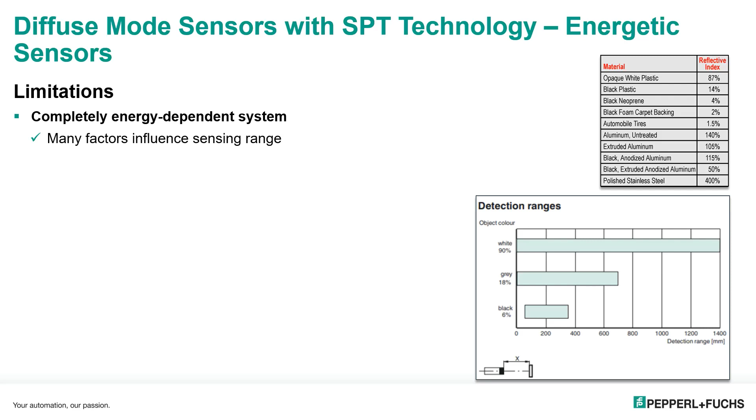If in the background there are more reflective objects than the actual target, then the background objects will be detected, but not the actual target. So this is an energy-dependent system. The amount of light energy coming back from the target depends on the reflective index of the material. Please look at the animation to see how different color of the target influences the amount of light energy coming back. And one more time.

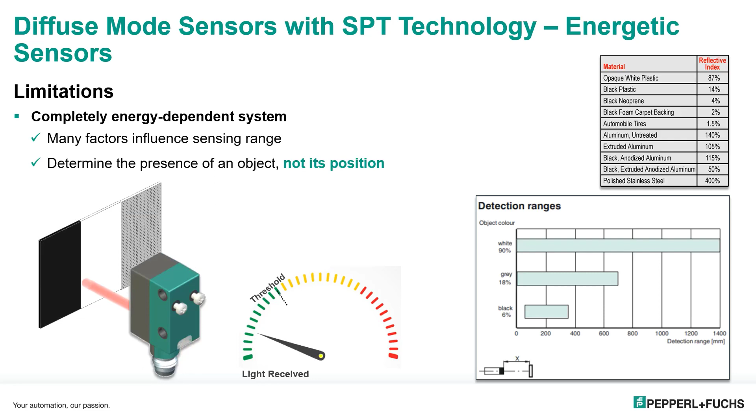Here you could see the most popular energetic diffuse sensors in our portfolio. Those are sensors with SPT single pixel technology: GLV18, RL31, RL61, VT18, ML17, OBT series, GLK18, OBD, and OCT300.

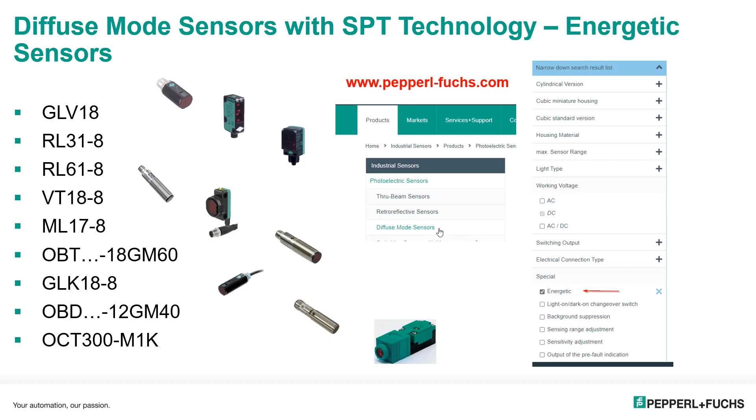Based on the triangulation principle, the sensors of Pepperl+Fuchs are all either background suppression or background evaluation or analysis. Today, we will be looking particularly at the background suppression sensors. They detect objects up to a defined distance but not beyond. The light from the sensor's emitter is reflected by an object to the sensor's two-segment receiver based on the distance of the object. Remember, we were talking about dual pixel receiver.

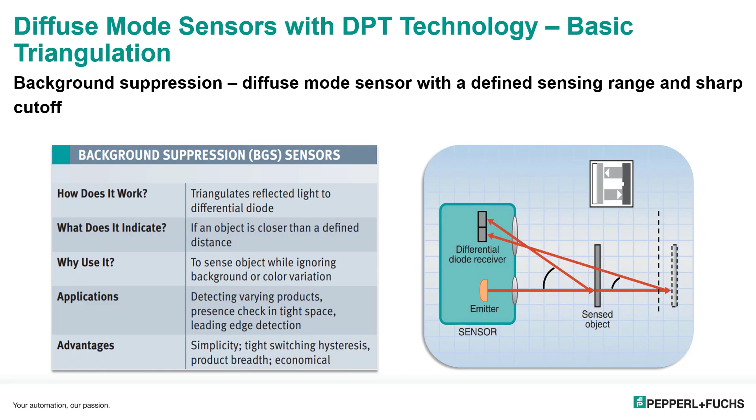Depending on that triangulation angle, the object is either detected or suppressed based on which receiver segment sees more reflected light. This way, background like machine panels, conveyors, and sidewalls can be correctly ignored, and materials and products with varying colors and printing are seen at a consistent distance with no adjustment needed.

Let's look at the dual pixel technology, which provides 2 pixels, shorter pixel far diode and longer pixel near diode, and compare with the single pixel technology SPT, where only one single pixel is available. Where the light spot falls, there the current will be created. Detection happens based on the position of the light spot, not on energy.

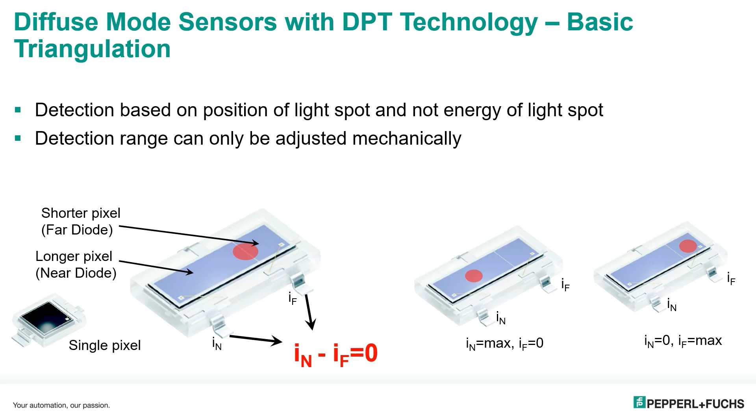Detection range of the background suppression sensors can only be adjusted mechanically. The most common adjustment methods are adjustment of a position of a lens, mirror, receiver, or both lens and receiver module. Let's look at the benefit of a triangulation sensor. But first we need to understand some geometric relationships.

There are a few variables in the system which we can define in relation to the optical emitter and receiver axis. X is the distance to the object. Generally, that is what we would like to know, where the object is. H is the emitter-receiver separation distance, sometimes also called baseline. F is the back focal length according to the lens and optical design. P is the position of the light spot in reference to the receiver optical axis.

We talked about dual pixel technology and basic triangulation. The basic triangulation is about detecting the proximity of object, whereas advanced triangulation is about measuring the true object distance. Sometimes a binary on and off signal is all that is needed in the application, and therefore a background suppression sensor with dual pixel technology would be a good option. But there are times when you want to know the exact position of the object. That is where the advanced types are needed.

You remember we were discussing the light spot walk. Let's look at common light spot tracking components found inside the sensors. The first common type is the lateral effect position sensing devices, PSD. It is an elongated element for capturing photons along its continuous surface. The photoelectric effect causes current to flow as light strikes the sensing area, with output currents proportional to the proximity between the terminal and the light centroid.

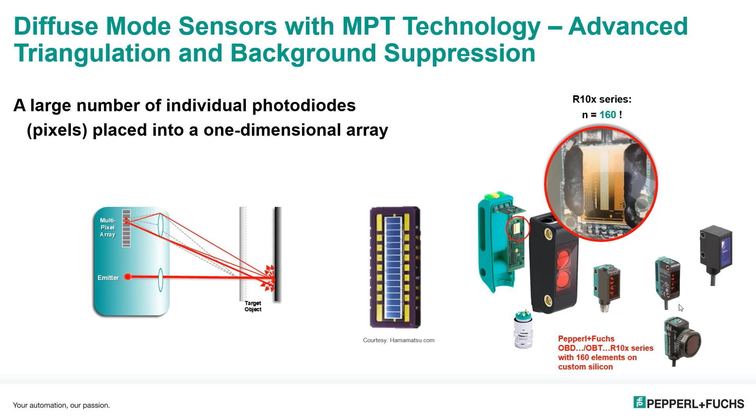The PSD element is predecessor to the multi-pixel technology MPT. The MPT technology is a large number of individual photodiodes, pixels, placed into a one-dimensional array. Among Pepperl+Fuchs products, there are R10x series which use MPT technology. The same idea of the far and near fields applies, but is represented by multiple individual photodiodes, pixels. The multi-pixel technology MPT was developed by Pepperl+Fuchs.

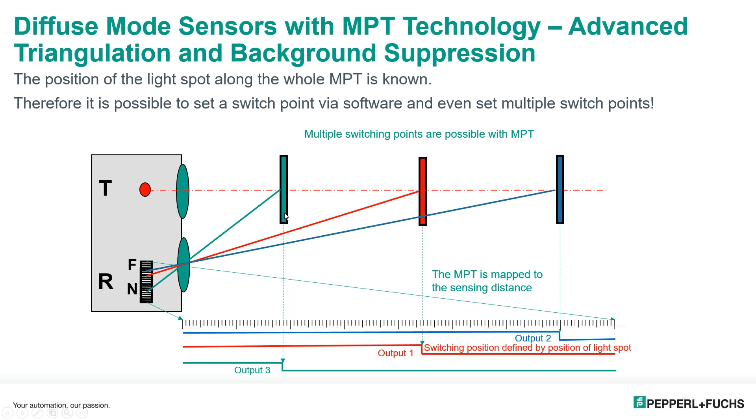This technology makes it possible to provide multiple operating modes. The position of the light spot along the whole MPT is known. Therefore, it is possible to set a switch point via software and even set multiple switching points. The sensors based on MPT technology provide multiple benefits, such as color-independent object detection or smallest black-to-white difference, interference-free distance measurement. The sensors are easily adjustable via IO-Link.

For example, detection range can be adjusted electronically, not mechanically anymore. Within one and the same sensor, there are possible multiple switch points and windows. Also several operating modes selectable via IO-Link. That is a big cost-saving factor. With this technology, there are background suppression and background evaluation sensors of the series OQT with multiple switch points and

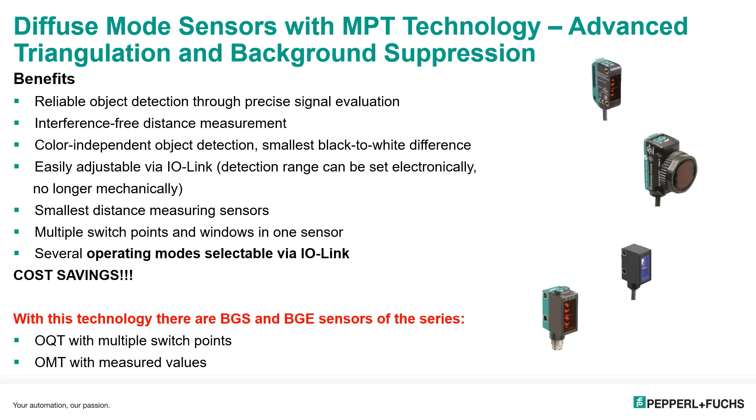OMT with measured values. Let's look at the graphic differences in the detection with DPT versus MPT technology. DPT detects position with a threshold, whereas MPT evaluates the topmost position of the curve, which corresponds to the center of gravity of the light spot.

DPT sensors are not suitable for remote parameterization because only mechanical and electronic adjustment is possible. They also have reduced detection range, since the light spot must always lie on the transition between near-far field element of the receiver. The black and white difference principle is not always avoidable.

MPT offers the opposite to the DPT. It is ideal for remote parameterization, longer detection range, and there is no black and white difference. What is the limit of possibilities for MPT technology? Let's look at the next pictures.

First example, a miniature sensor with a 25 mm height. This family has a background suppression version with maximum sensing range of 80 mm, which is approximately 3 inches. We do not offer this family with a measurement output. Next, a little larger family of 38 mm in height, and the background suppression type maxes out at 350 mm range, approximately 13 inches. And we offer an advanced measurement type which maxes out at 200 mm, 8 inch.

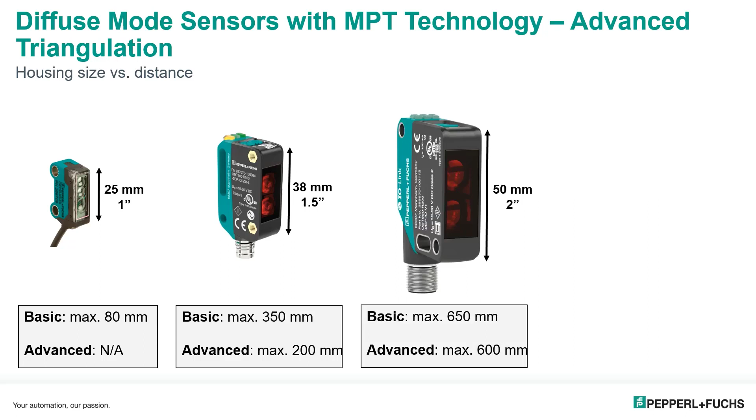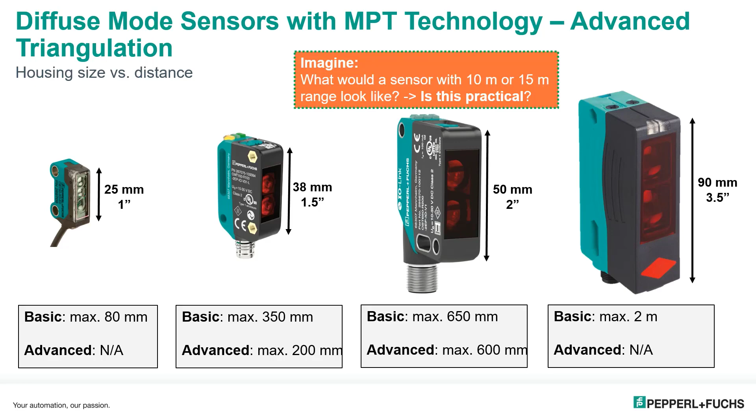Again, a little larger size, and we achieve a range of 650 mm, about 2 feet for the background suppression type, or 600 mm, about 2 feet for the measurement type. Last one, bigger housing, and now we have about 2 meters or 6.5 feet range. I think the message is becoming clear now. To achieve larger sensing range, the emitter-receiver separation distance has to become larger, and thus the housing size does as well. At some point, though, continuing to increase the housing size becomes impractical.

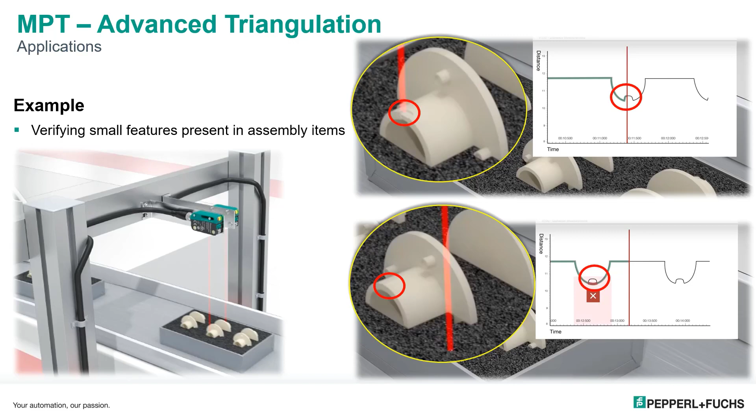Multi-pixel technology enables micrometer-accurate distance measurement, detecting even miniature product features and the slightest position deviation, like verifying small features present in assembly items like shown on this slide. This application requires checks to ensure that the bottles are properly sealed. If the caps are not completely sealed, the bottles are removed.

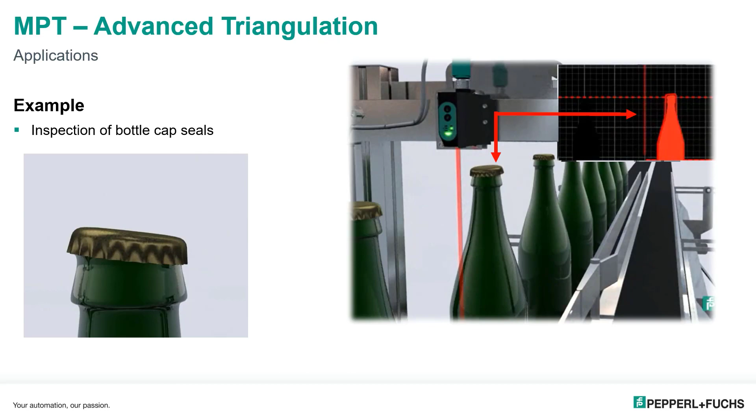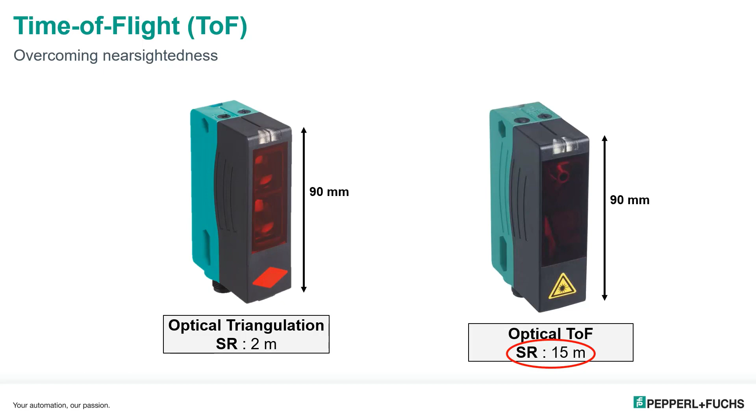After seeing the limits of the multi-pixel technology, the next step would be to reach out to a different way of detection and evaluation of the signal without making the housing even bigger to work with longer distances, and this is the time-of-flight. The time-of-flight technology is nothing new for us. We have seen it with radio waves, sound waves, and now we see it with light waves.

The time of flight is being measured through direct time method or phase shift. Some manufacturers are going the path with phase comparison, but we choose the direct time method. To differentiate ourselves in this regard, we use the term PRT, pulse ranging technology, as a replacement for time of flight. How does it work? The light is emitted, the clock records it, then the light comes back at the receiving element, and the clock measures the time. Knowing the speed of light and the elapsed time, we can calculate the distance.

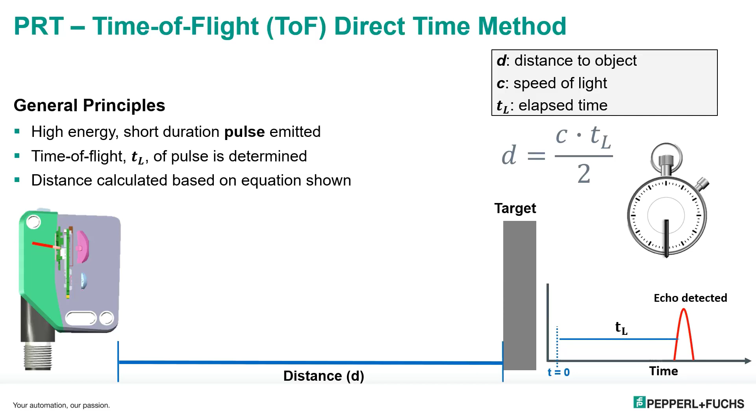Where are the challenges with this technology? When we know the speed of light and operate with such time units like nano or picoseconds, then we reach the limits in achieving certain resolution values. And why? Because the modern Si-based CPU clock speeds which are available right now are up to 3 and 4 GHz for conventional CPUs and 8 to 9 GHz for nitrogen-cooled CPUs. There are general principles of pulse ranging technology. High energy and short duration pulse emitted. Time of flight of pulse is determined, and distance can be calculated based on equation shown.

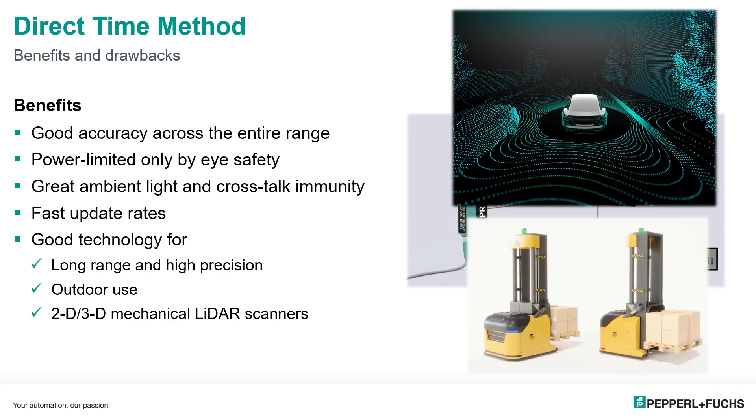There are a few drawbacks of the direct time method. There is limited availability of different types of electronic chips like ASIC or system on chip, and it can be very expensive and difficult to implement into 3D cameras. The benefits of direct time method prevail though. This is good accuracy across the entire range, ambient light and crosstalk immunity, so it is the best combination for both long range and high precision. It is being used in 2D, 3D Lidar scanners for navigation and mapping of autonomous vehicles.